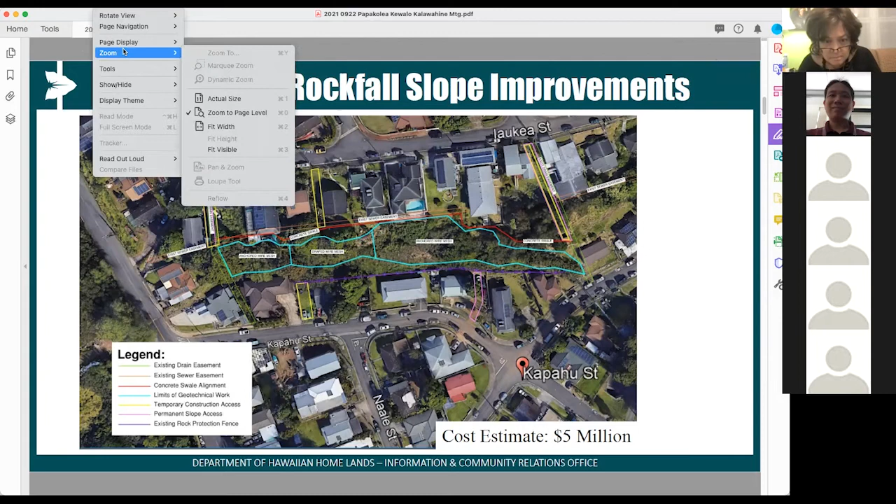As you can see up on the slideshow, there is a figure, and I apologize if it's a little hard to see. If Cedric can blow it up a little bit more, that'd be great. But if not, then we'll all squint a little bit. But I'll just describe all of the different components of this project as best I can, and try to keep this very simple and straightforward and easy to understand. But again, there will be time for questions as well later during the presentation.

I think this invite went out to all of the community in Papakolea, but if you might be near here or living along the stretch of this project, you'll know which rock face that we're talking about. So quite a vertical rock face here, about 100 feet plus tall. Quite a large bunch of boulders. A lot of boulders have been falling down this hillside over the last few years with some of the heavy rains.

DHHL in the early 2000s had done a rockfall protection fence at the bottom of this slope that follows the back of the lots, basically from I think it's 2136 Kapahu Street, where that purple line goes. It's really hard to see. And so there is an existing rockfall protection fence there, built in the early 2000s. Since then, the rocks have been falling and the fence has been doing its job.

But at this point, quite a bit of debris has built up on the fence. And so part of this project, first of all, is going to be clearing that debris, removing those rocks and boulders, and restoring that rockfall protection fence. Repairing any of the top rails, the bottom rails, the mesh, any of the posts that need to be repaired, that will be kind of the first part of this project.

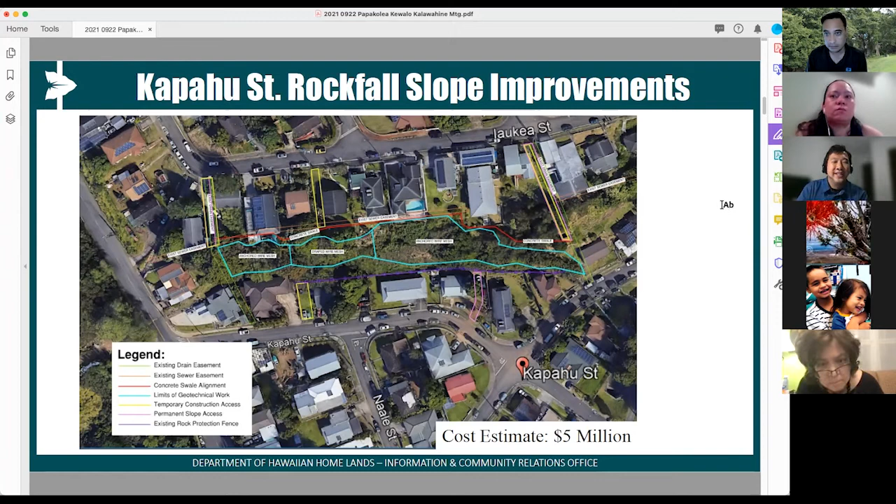So with that, I'll ask Cedric here to go to the next slide, because we do have some pictures and some exhibits of what some of the impacts will be from these access points to these lots. And so first you're seeing the upper left portion of the project on I'aukea Street.

There are two access points here, a permanent access point that's being proposed on the left that kind of follows an existing drainage easement, and then a temporary access way on the right that hopefully Cedric will bring back here. And you're seeing that with that kind of gridded pattern on the right.

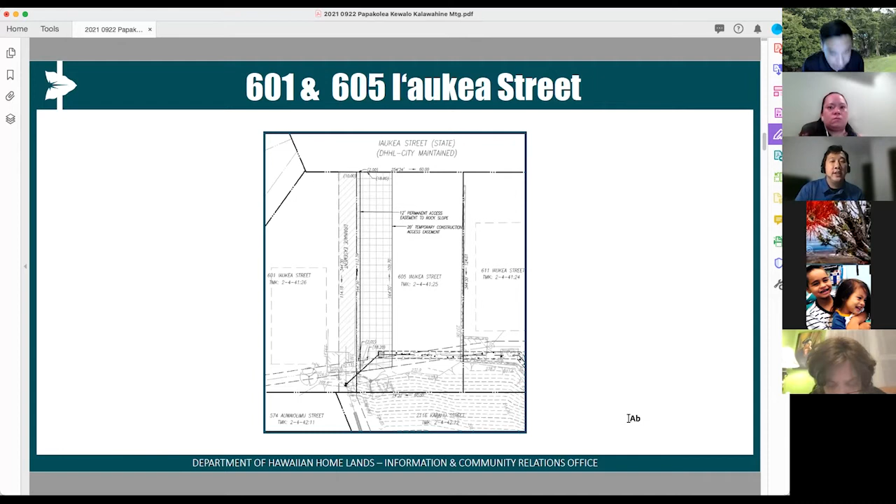And this one, actually, I think we've had some outreach already with the owners of 601 I'aukea Street, as well as 605 I'aukea Street. So if you go to the next slide, Cedric, you'll see a picture here of what this might look like. There is an existing driveway that will be utilized for construction. And then I think there's another slide after this, Cedric, if you want to advance one more.

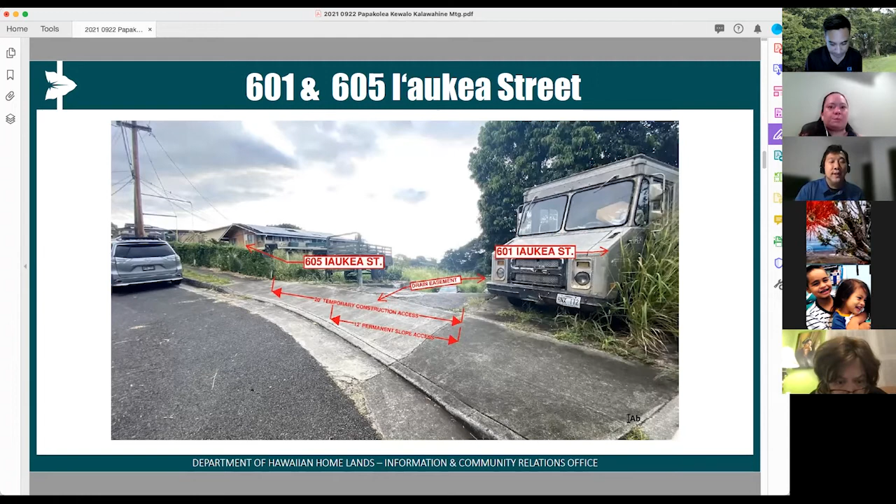There is an empty lot here at 605 I'aukea Street. I know the lessee here has plans to build a new home, but at this point in time, they do not have any immediate plans to build. And so the department would like to utilize this empty lot, obviously, to minimize disruption to any of the lessees in a more significant way.

I would point out, as part of this project and as part of the construction plans that have been developed, and as part of the request for proposals that have been initiated to the contracting community, the contractors will be responsible to restore these access points to their original or better condition. Obviously, if you have heavy construction traffic coming in here and it damages a sidewalk or a pavement, or it damages a wall or curb, then it is the contractor's responsibility to fix.

In many instances, and I think we'll get to other lots here, the contractors will be required to remove fences. I know a lot of the homes here have perimeter fences, whether that's chain link or other. They will be replacing them where they need to remove them to provide access.

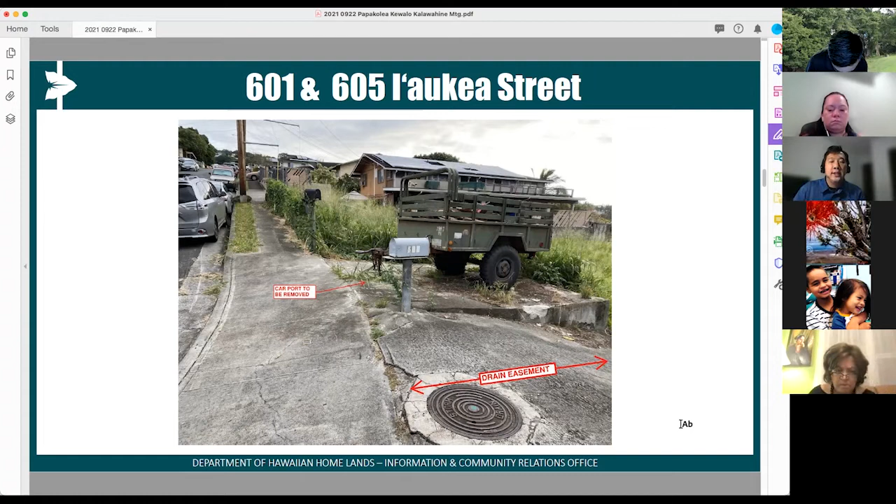Cedric, if you could advance to the next one. And I'm following along here. You're seeing again this particular condition at 605 I'aukea Street, where it is basically an empty lot. So easy for the contractor here to use this area as a staging and equipment laydown area. But obviously we start with the easiest. We're gonna get to some of the more complicated areas here in a bit.

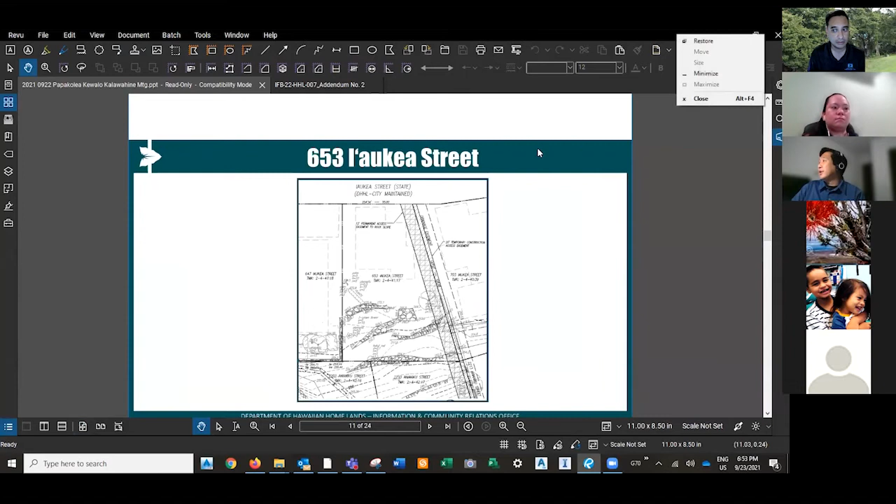Can I ask a question? Sure. My name is Punani Richards, born and raised in Papakolea, and I received a card in the office, and I just got to connect 10 minutes ago, so I missed the very beginning. And the purpose of this is because the mountainside is unstable, right? And if not done, it can cause problems to the homes in the Kewalo area. That's correct. That's correct.

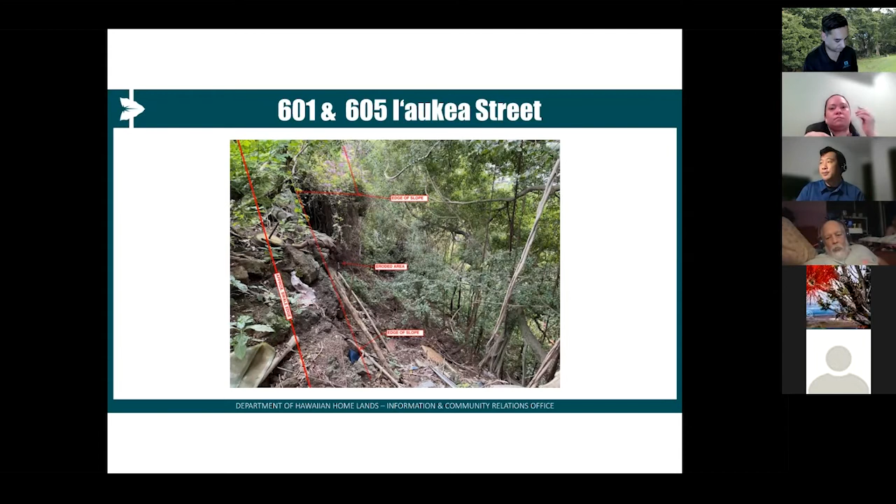We're shifting over here to the very top left of the project, which is furthest uphill on I'aukea Street, 653. And this is the further north side, Mauka side of the project. And you'll see another access point here to provide access to the back of the slope. And so this will obviously impact a side yard of this particular property. But again, it's something that for the purposes of this project is absolutely needed.

I'll just point out here, as you can see on the left-hand side of this exhibit, at 647 I'aukea, the lessee here has built a wall up to the property line, and that's something that we've noticed and tried to protect in as many situations as possible. You can see a little portion of the concrete drainage gutter going behind here. And so we're really trying to stay away from the existing improvements that the lessees have installed.

That being said, like I mentioned, there'll be situations where things will need to be removed, things will need to be replaced, fences will need to be adjusted. You'll see in many of these homes on I'aukea Street on the top, a lot of the lessees have backyards and they use them. There will be, from the top of the slope, approximately 5 feet or more in, these sets of anchors that are going to anchor this mesh into the ground.

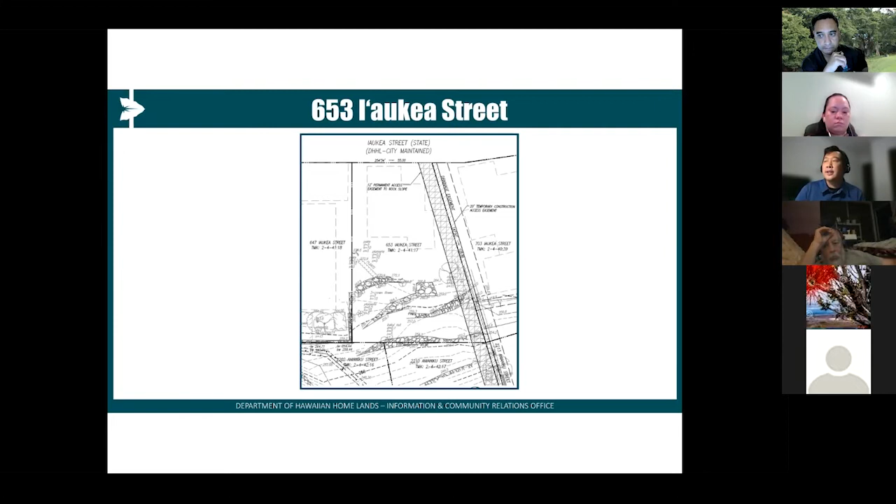And so you're basically kind of seeing what this is really looking like. This is not the slope where folks are walking. This is still on the top of the slope. The mesh will probably start right where that line of trees is. And so these are just some more of the pictures and things that the contractors will need to deal with

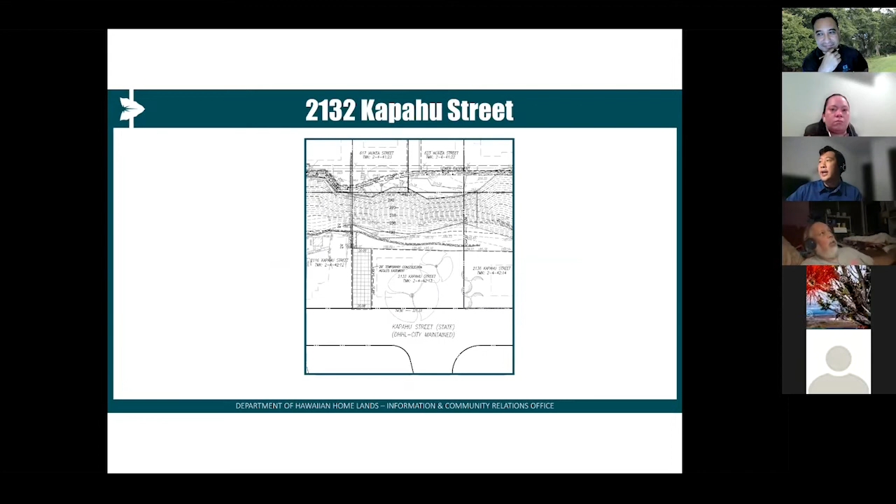on this project. For temporary construction access on the bottom here on Kapahu Street, again, we've got access provided to the back of these lots. In this sense, it's a little easier because there is a rockfall protection fence. You see it kind of in the back here, right in the dark shadow of this area. The disturbance is going to be a little bit less impactful because you've already got a fence back there that is delineating that line of work. And so there wouldn't be really any work in front of that fence except where there needs to be access points. And so here we're proposing one access point because, again, it's relatively clear.

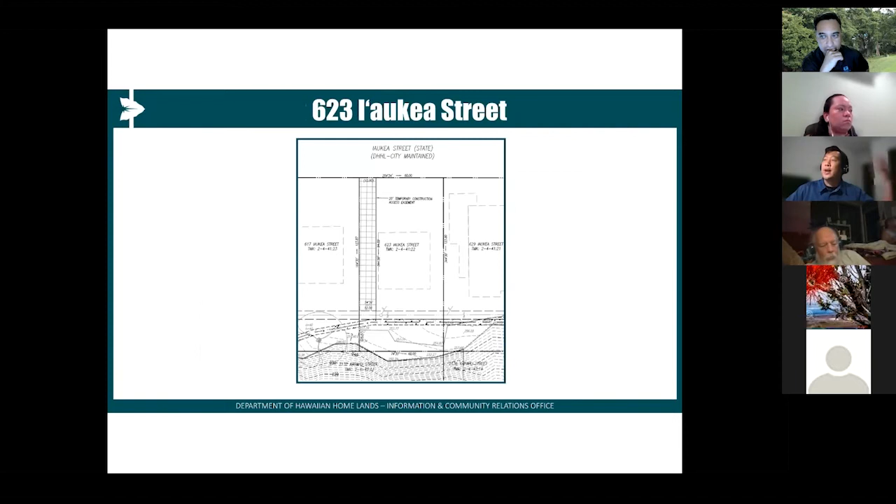I think this is another temporary construction access point, but back up on the top of the hillside, a little out of order here on I'aukea Street. So again, really trying to keep where we can find areas between homes and fences so we're not disturbing a lot of people's lots. This will be another temporary one that will be restored.

Again, so we've talked a little bit about the fences behind folks' lots, what might happen here for the contractor to access this area where they need to put in a concrete gutter, most likely on the left of the fence here, so out of folks' yards, but sometimes it may be in the yard, in the back. We are trying to do that, and the fences will be replaced. It is important to note that there is a sewer easement back here, so that's why some of this area is already kind of reserved anyway for some of these utilities and infrastructure.

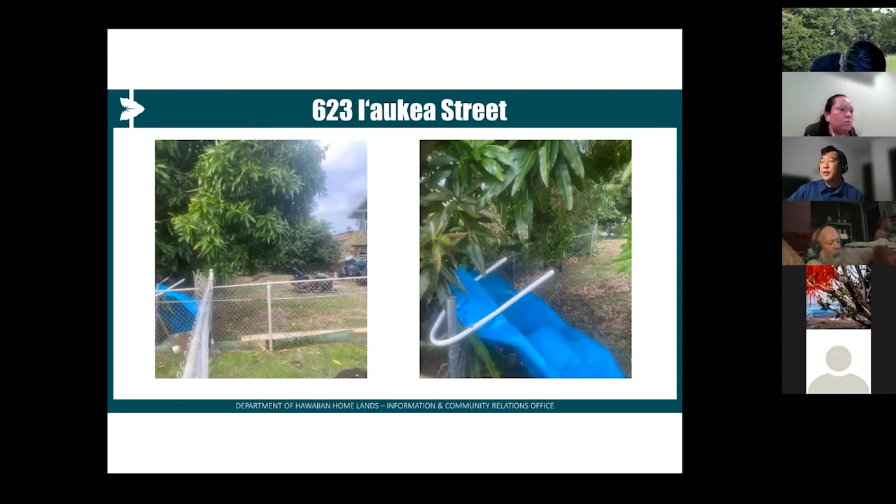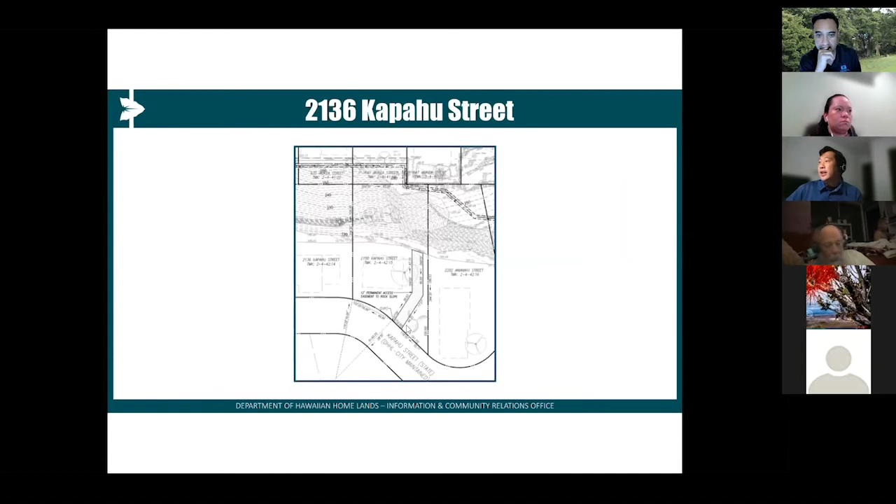And so this is the layout of that access point on 2136 Kapahu Street. You're seeing here the existing rockfall protection fence. You see how close some of this vegetation has really got to it. Again, as I mentioned at the very start of this presentation, the initial scope will be to clear behind this rockfall fence, remove the boulders that have fallen, repair any of the rails and posts that need to be repaired, and get that back up to a better functioning condition. In the permanent condition, both the mesh and this fence will remain, so it'll provide a little bit of extra protection here for these lessees.

And so with that, Cedric, that kind of finishes up my presentation of the project and these access points. I know there's probably going to be some questions and coordination. Again, the department is dedicated to working with all of you to make sure that this project is well coordinated and there are no surprises during construction. So with that, Cedric, I'll pass it back to you.

Thank you, Ryan. Actually, can you go back to the slide that has the map of the entire area? I think it's one of the first slides. There you go. The overhead shot. Yeah. Okay. And then we did have a question in the chat from Pua, and I think she was asking a specific question about the dashed lines on one of the maps, but more importantly, are you able to point out where the anchors are going to be on this map?

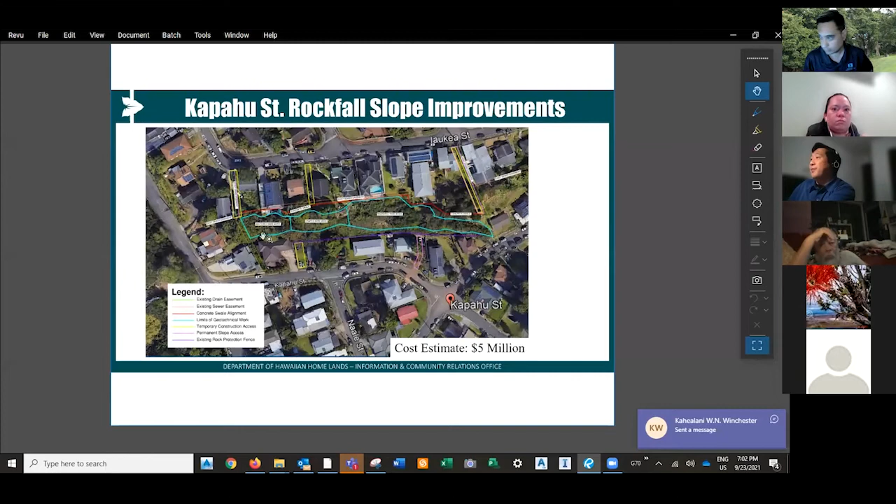Sorry, I muted myself. I will do my best, but let me get out of presentation mode here. If we were to kind of zoom in here, this back of this blue line is basically the top of the slope. So if you can imagine the slope from all of these lots there, it's kind of benched down as it heads down here.

And then from the top of the slope, behind that about 5 feet, and you're really not going to see it in the scope of this high level figure, but just 5 feet back from here is where the first row of anchors would probably start. I don't believe, and Kahea, please correct me if I'm wrong, that it goes much farther than 5 feet. So that will be, I think, in many instances, the only row of anchors at the top.

And I'm sorry, I think at the beginning I was able to scroll in a little bit better. On the outside is the anchored system, which is going to be anchored at specific points along the entire face. And in the middle is the drape section, where this is just going to be anchored at the top and on the bottom.

In orange, you see here in a little bit better detail, and again, this is an aerial image that has been used to prepare this figure, this is not a survey grade document, but this orange is where the existing sewer easement is. So there's a sewer line under this area. And in all instances, except for this area on the left here, the concrete swale will stay makai of that sewer easement.

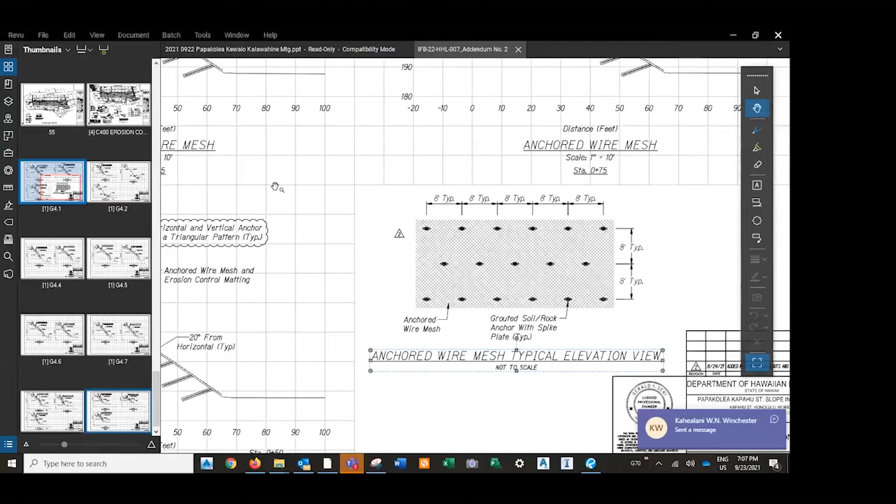That's the guy that came to our house. And so if you'll see here, this is the wire mesh, and so it's close together. It's literally kind of a mesh. It's a flexible mesh. And where it's anchored, again, you'll see on 8-foot typical spacing, there's anchors driven into the rock face that hold this in, and they're grouted.

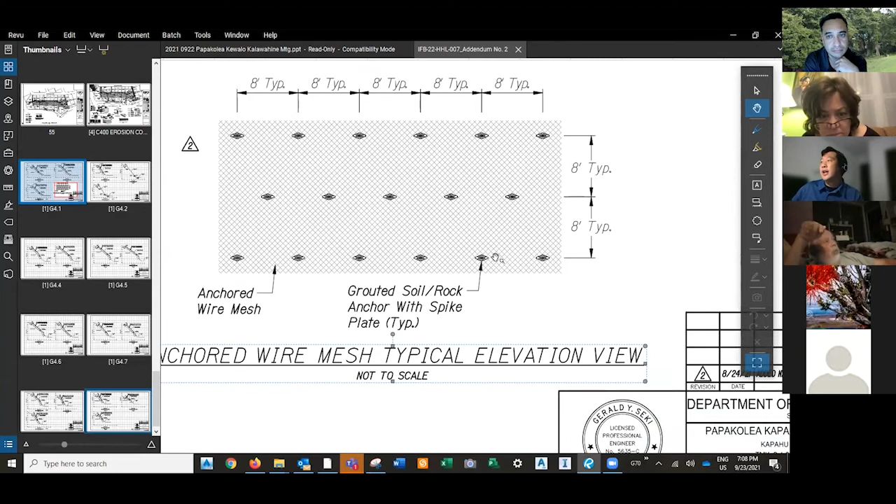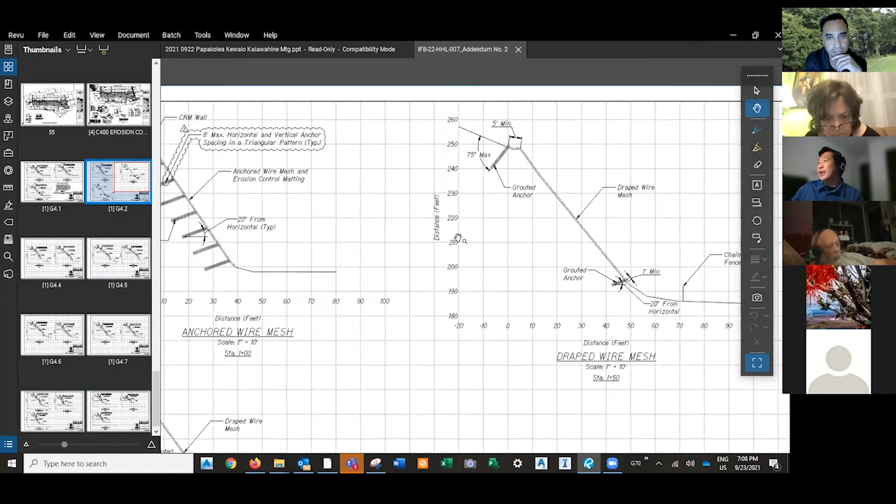So if you were to look at something like this one here, the draped one or the anchored one here, the 5-foot again at the top is where they'll anchor in, and they will just drape this over the slope, and they will need to anchor this again in at the bottom. They pick a black color, so at some point you really don't see it because it's so finely spaced.

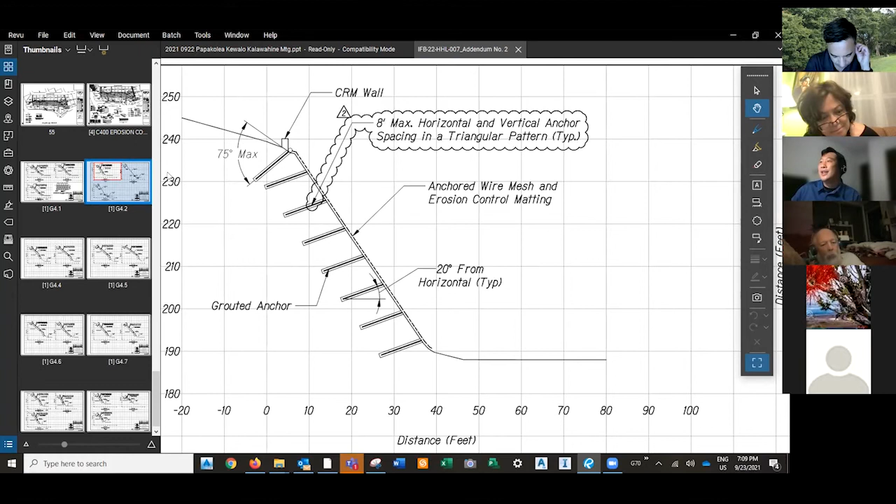Where it is anchored, sometimes you can see that anchor point. They're almost like little circles on the rock face. But again, we'll use something that's a better color, like a black color. At some point, with the way that vegetation grows, you really don't see it, especially when it's far away. So this is kind of the best way that it looks.

Actually, that really helps to see that. Thank you. And then you said that the vegetation, trees, that scrub was going to be cleared, but is there going to be vegetation that grows back, or is it just going to be this bare rock face that we're going to see? I was just curious about that.

Yeah, so the best way to describe it is like on Owailimu Street, they did a very similar rockfall mesh project, and some of that bushy grass is starting to grow back in and into it. The point would be that there really shouldn't be any large trees growing through this mesh. The department will need to make sure that if anything takes root, they're removed. The existing vegetation will be removed, so it will look very bare initially.

They are going to scale it. They're going to cut it. They're going to trim it. They're going to poison it where they need to, to kill the root system so there's less of a chance of it growing back. The trees and the vegetation roots are what cause the rocks to dislodge, right? So you really don't want any vegetation in there. We know it doesn't necessarily look the nicest, but vegetation is not a good thing for any kind of slope that's really vertical.

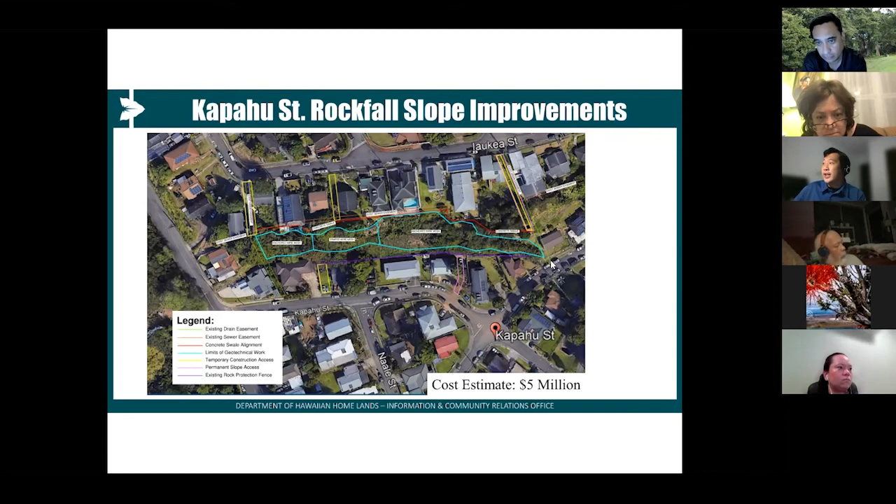Thank you, Ryan. We did have a question in the chat about how much of an impact there is on lessees. I believe there's 3 lessees on Kapahu Street. Would you be able to speak to the impact over there? So definitely here on the right, I think this address is on Kapahu Street. They will see contractors back here scaling this face, removing the vegetation. This anchored wire mesh is going to go where there is a drain line that comes down here. You can see it, it's very light green. I'll try to zoom in again.

There is a drain line here. So right where this green vegetation comes down and the existing rockfall fences, you're still going to see anchored wire mesh back here. Contractors will be coming through this area, not through this one. This is a permanent access. The construction access will be in this yellow. They'll work behind the fence and get to this point, clearing and scaling, and then installing that rock mesh.

On the right here, this unit is quite a bit higher than Anianiku Street. The driveway is quite steep and there's some stairs here. So this lot and this lot are on closer elevations to the back of 653 Kapahu Street. So you may get some contractors back here doing some work, trying to get this concrete swale in and trenched in a drain connection into that drain line. There will be a catch basin, a drain inlet that will core into the city's existing storm drain system here.

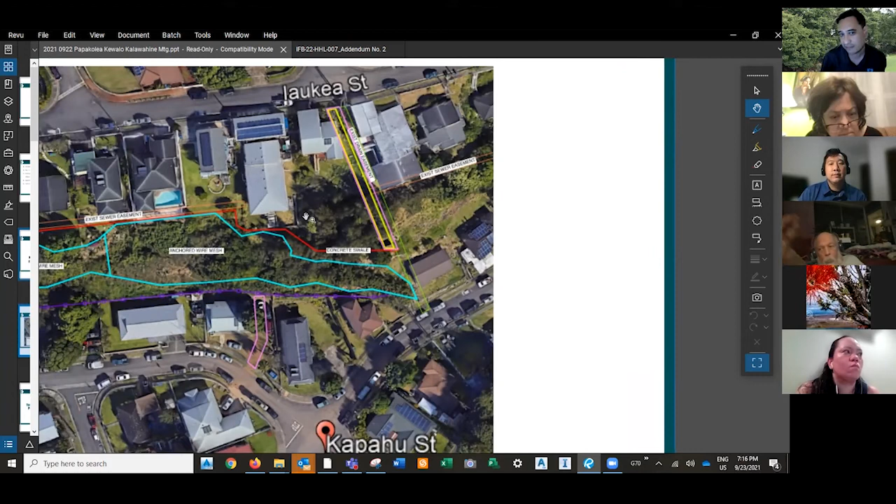Thank you, Ryan. There is a question about trash in the wooded area above the cliff and whether we're going to be able to pick that up. I'm not sure if that's within the scope of work, but if it is, we'll make sure it's addressed. If it's not, we'll figure out a solution afterwards. But good to know that there is trash there that we're going to have to deal with once the construction begins.

And I do want to highlight that we've put this project out to bid, and we should have bid results available soon. Once we have that information and can put together a construction schedule, we will be sending mail out to impacted lessees so that all of you are aware of the schedule and timeline, and when different construction work will occur near your homestead lot.

Hi, Cedric. I'm sorry to interrupt. All good. I have some questions if you don't mind. Of course. My name is Butch Ramos. We live at 2132 Kapahu Street. First question for Ryan: was G70 involved in the original project? G70 was not involved in the original project, but our geotechnical engineer, GeoLabs, was involved in the original rockfall protection fence project. So are you guys associated with them? They are our subconsultant, so we have contracted them on this project, yes.

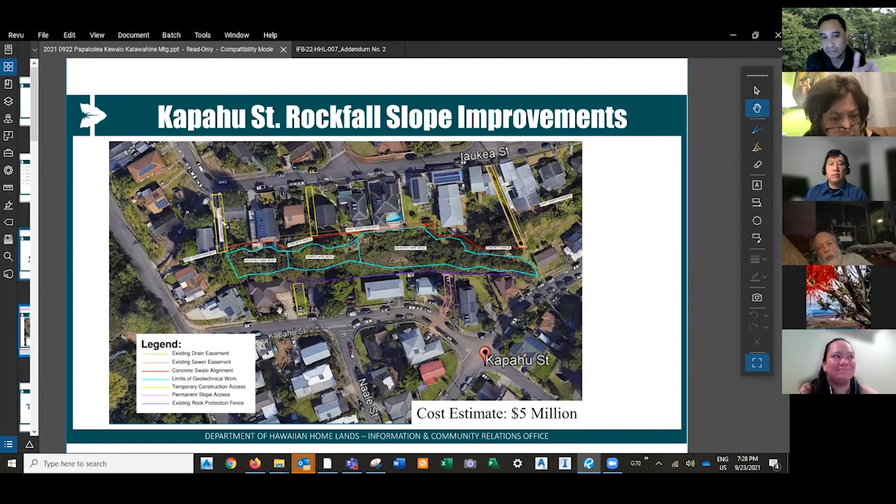Yep. If it's temporary, I will cooperate with you, Cedric. Currently, right now, we heard you loud and clear. The temporary access point is right there. That's why it's not in purple, it's in yellow. Yeah. Temporary, you guys can do it.

But if it becomes permanent... because if you guys, Hawaiian Home Lands, didn't allow other people to put a wall up and break up your egress, we wouldn't have this problem today. That thing would have been there to make the project work. I hear you. With that, Cedric, you and me can talk story and drink beer later on, but I've said what I want to say.

One last thing. Right. According to the rules of Hawaiian Home Lands, if you guys take any property, not property, but if you take any, I don't know what the word is, but if you take anything from us that was there, like walls, yes, you guys should compensate us for that. Yeah. And, you know, in 20 years, we still haven't had compensation. And you and I can talk about that later, though.

Main thing, I think it's important for everybody so that everyone's in the loop. The department's always gonna adhere to whatever is in the lease document. So if easements need to be exercised, if your improvements are damaged, as Ryan was mentioning earlier, we're gonna have to take down some fences on the Kapahu Street side. We're gonna replace them. So if there's improvements that are impacted, we're gonna work with the lessees.

But I think the important takeaway is that whatever is contained within a homesteader's lease document is what the department will abide by. And that's all the lessees can hope for. But if it's there, you and I have to agree. If it's there, both parties have to adhere to it. Yeah, I mean, there's no deputy attorney general on this call, and I'm sure they'd be... I already called Iggy. He's listening in on this, okay? But main thing is lessees should know that the lease document is what DHHL and the lessee will work off of. Yep. Okay. I want to give an opportunity for anyone else who may want to unmute and ask any questions at this time.